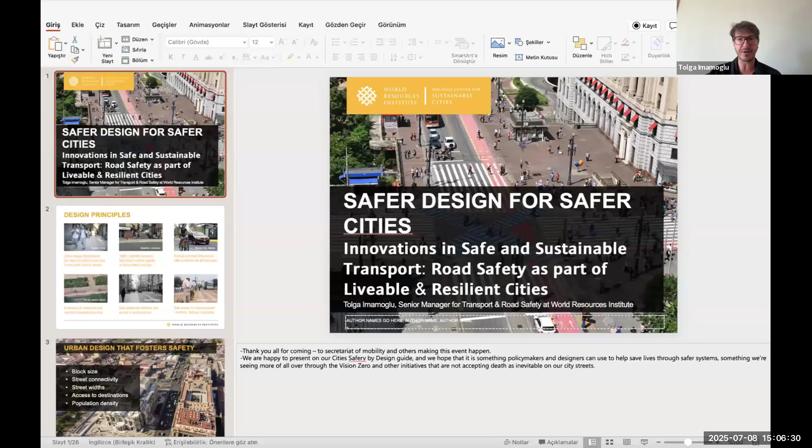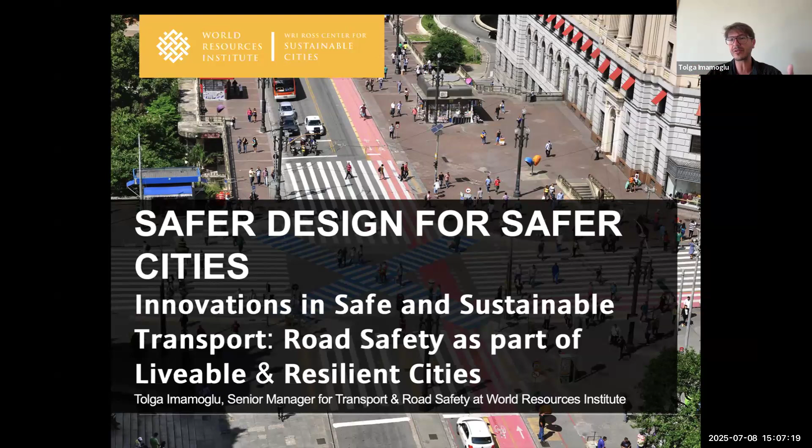Today I'm very glad to present the WRI guide, Cities Safer by Design. From my end, I believe this guideline is a complete guide for navigating planners, engineers, and even policy makers on how we can save lives and establish a safe environment for the whole citizenry and all road users in our cities. For our interpreters, I'm trying to speak very slowly.

Okay, here we are. In this guideline, we divide the themes into 6 design principles. In this slide you can see our 6 design principles. Each chapter in this guideline is focused on describing the elements and the evidence for implementing these measures.

In this guideline, I must outline that we didn't just get the best practices from the global north, like Stockholm, Amsterdam, or Copenhagen. We tried to compile different cases and best practices especially from the developing world, like Bogota Colombia, Istanbul Turkey, India, Mexico, and so on. We focus on the global south.

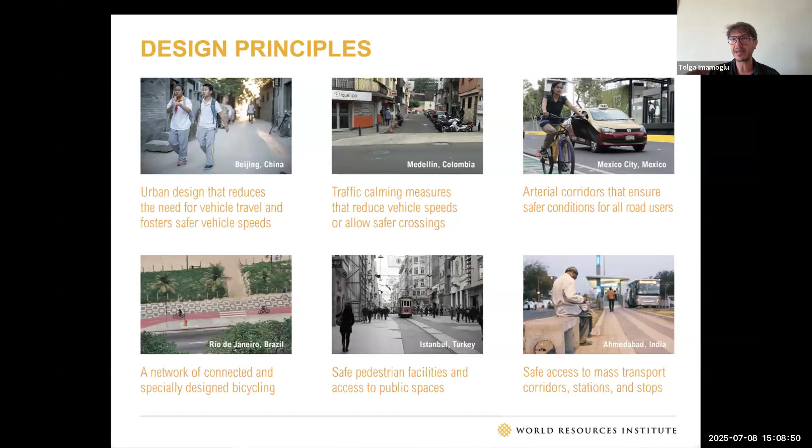My message is very keen and straightforward: good things are also happening in the developing world. The only thing we need to do is identify, measure the impact of these measures, and scale them in our context.

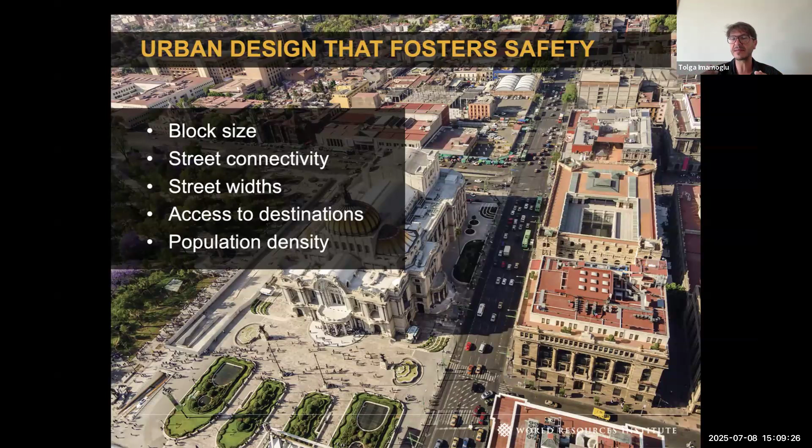So I would like to start with urban design, which is very key. All research shows us that cities with small block size, good street connectivity layout, and compact living with destinations nearby such as education, religious spaces, retail, and residences can be safer cities.

I just want to mention a couple of the measures that we put forward in this guideline. Small block sizes require a smaller reaction time and smaller stopping distance, which means we have to avoid superblocks and build our cities with small blocks.

In this sketch you can see that with small blocks, it's harder for vehicles to speed up, and it requires lower speed. But in that case, with small block sizes, we are going to have a number of intersections, which means we can have more traffic crashes. However, through lower speed we are going to favor fewer casualties and injuries, because we'll mostly have property damage instead. This is our design impact.

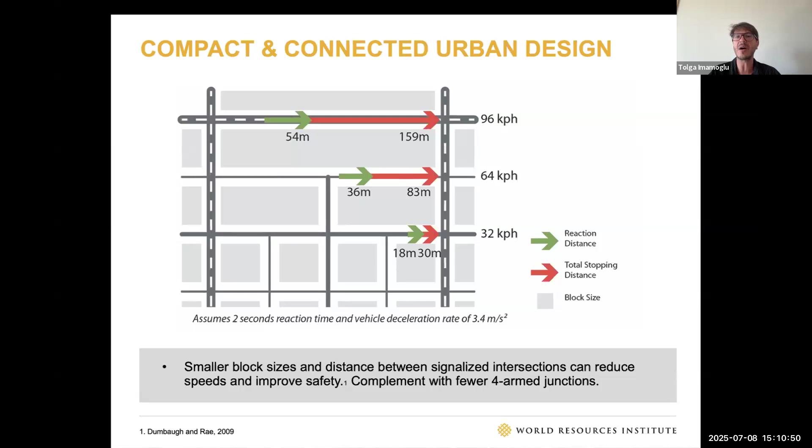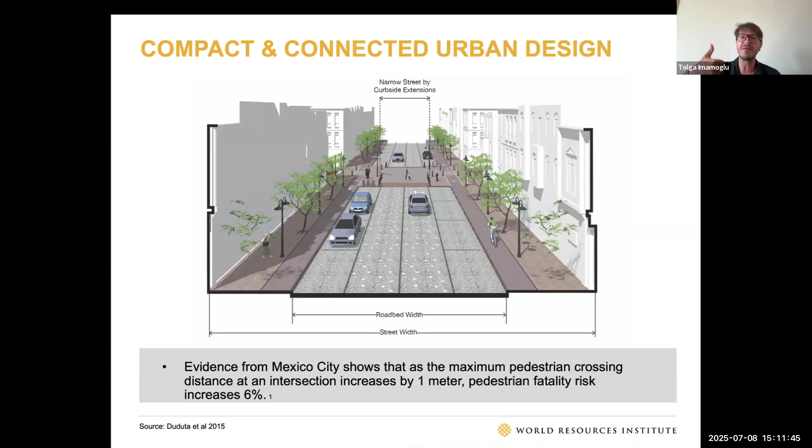This is a very key design language here. Again, if we increase crossing distance by 1 meter at an intersection in downtown, we increase pedestrian fatality risk by 6%. I think this is another key slide from my end.

5 years back, the pandemic threw everything out of gear, and at that time the mayor of Paris came up with the intervention of the 15-minute city. Maybe for the global north, like Paris, it might be convenient to use that proposal, but for the developing world it's quite challenging to establish a 15-minute city. In the global south, we can instead follow a neighborhood-level assessment.

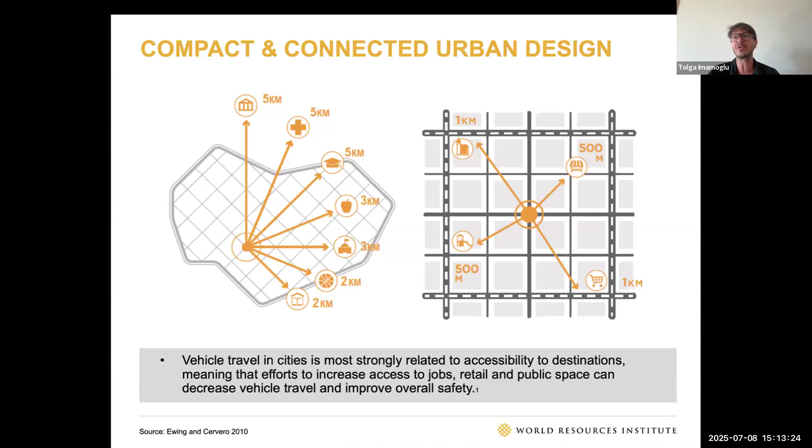Our major task must be how we can reduce vehicle travel in cities. So we need to create compact neighborhoods, so people can easily reach education, religious places, workplaces, or parks by walking and cycling in less than 15 minutes. My message is clear: we have to create our cities in a compact and connected way in order to reduce vehicle travel demand.

The traffic calming measures in this guideline show a set of interventions. We cannot just rely on speed limits; the speed limit must be supported by physical interventions, traffic calming measures. In this guideline you can see the whole series of interventions: speed humps, cushions, chicanes, narrowing down, and so on.

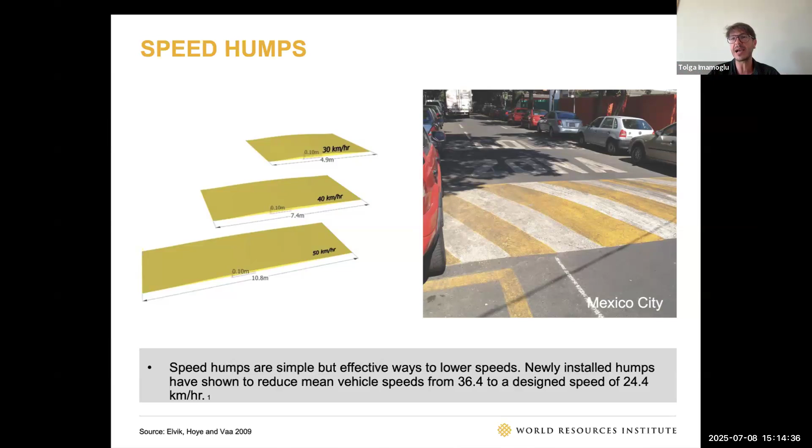This is the speed hump, a very cheap and practical way to reduce speed. My example here is from Mexico, where newly installed humps have been shown to reduce vehicle speed from 36 to 24. Based on the desired speed, you can design and implement this measure with different dimensions, width and length. These are engineering details, and some cities and countries have very complete national guidelines for traffic calming devices.

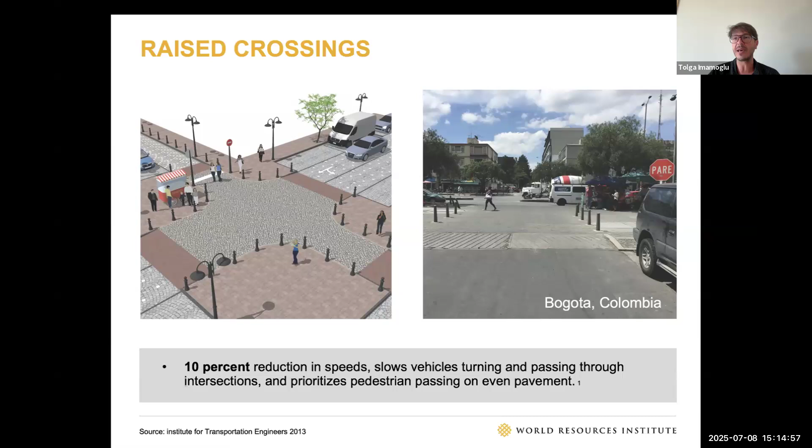The raised intersection is not a common intervention, but I want to mention it. From Bogota, Colombia, we found that raised intersections reduce speed by 10%. And the curb extension is similar - if we add 1 meter, it's going to reduce pedestrian crashes by 6%.

The urban artery is a very key issue, a common concern in road safety around the world - how we can redesign or revisit our urban arterials where we have casualties. Vehicles are speeding, retail shops and facilities surround that area, and pedestrians and passengers are there - the artery is the heart of the city. So we have to come up with a unique solution.

If we would like to change our urban artery in a safe and accessible way, we have to consider the complete street approach, which means we have to claim space from motorized vehicles and adopt a mass transit system - it might be central median BRT system. At the same time, we can support this system with walking and cycling facilities. The complete street approach is a key intervention for redesigning our urban arterials.

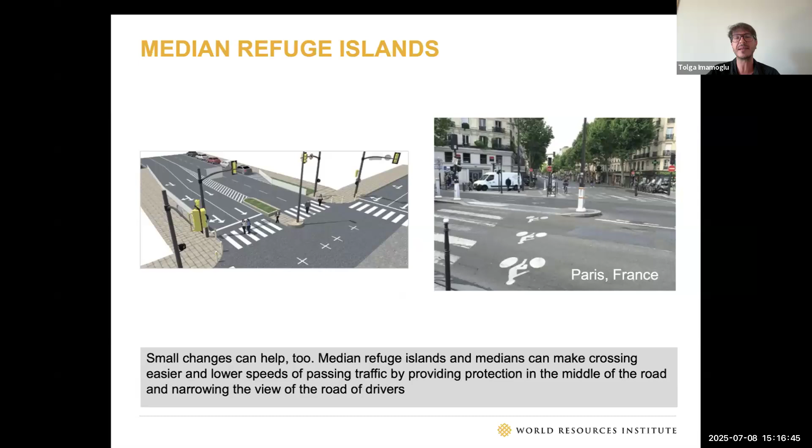Even a small change, like putting in a median refuge island, can save lives and improve motorcycle safety. This is a hot topic in road safety in East Asia, Latin America, and Africa, like Uganda and Kenya, Nairobi. We have recently launched a new guideline on how to improve motorcycle safety. We need to carry out an additional special session to discuss motorcycle safety, but my best advice is: you have to invest in public transit in order to improve motorcycle safety.

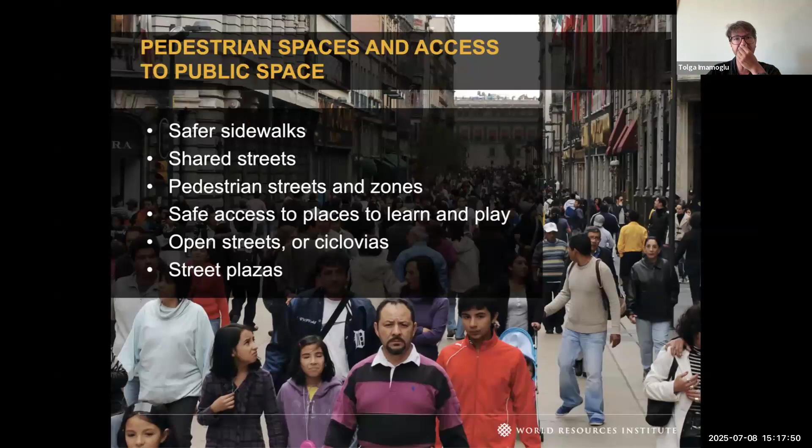There are some design interventions for sure, but I think the best way for cities is to invest in public transit. For pedestrianized streets and pedestrian space, there are a few guidelines on how to establish pedestrian streets, and in this guideline we have also carried out a survey. I would like to encourage all of you to go out and run a survey with your citizens and collect their thoughts on how you can provide safe and accessible walking facilities.

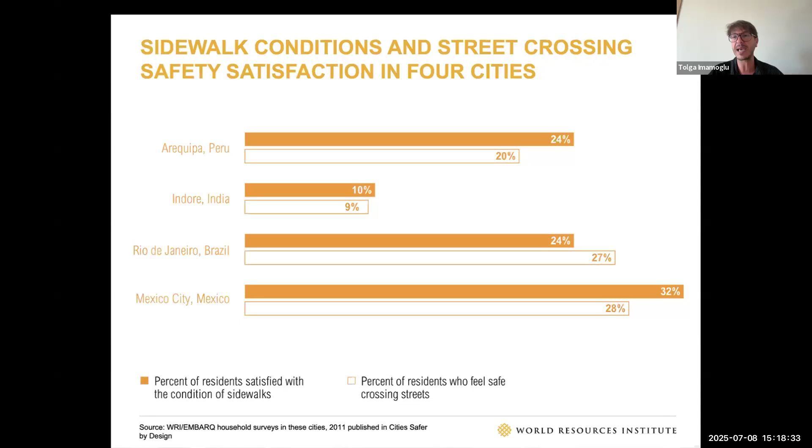Satisfaction is very poor in Brazil, Mexico, India, and Peru. If you renovate the sidewalk or pedestrian walkway, it has to reduce speed in that corridor by around 50%, and it has to reduce traffic casualties. In my own country, Turkey, we pedestrianized the whole major arterial in Izmir, and we found that we reduced casualties by 50%.

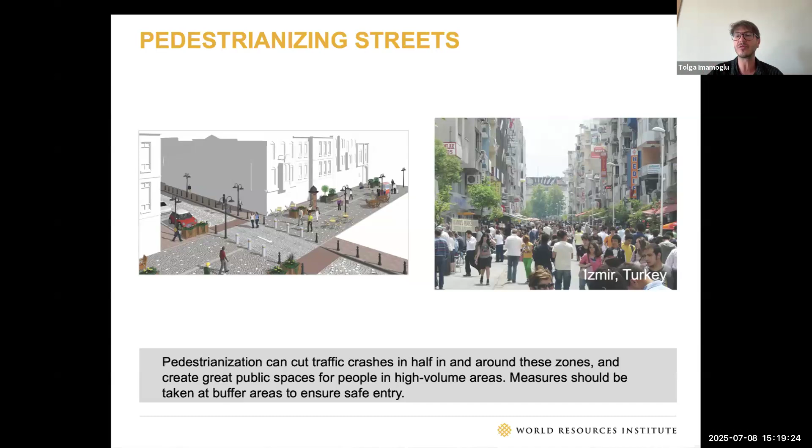Pedestrianization is one of the best interventions to reduce casualties and speed. New York did a great job back in the day with street plazas, adding furniture, and people actually enjoyed Times Square. The outcome was a 60% decrease in speeding and 26% reduction in injury with the street plaza. It's a win-win—people can enjoy the city, and this is the best environment to establish road safety.

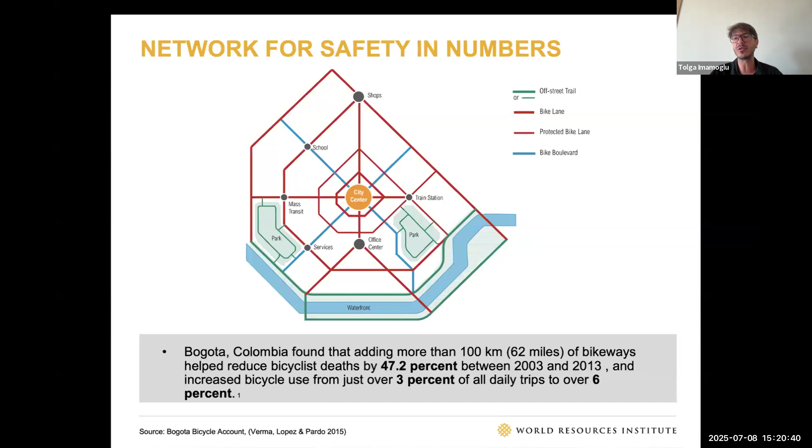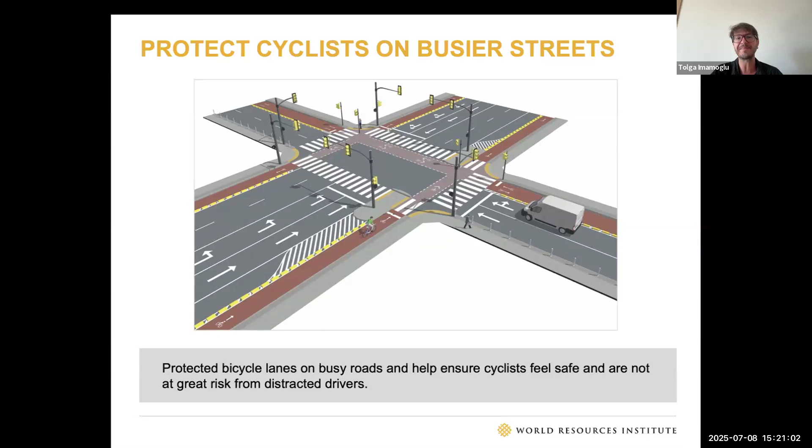And safe access to transit. As I mentioned regarding motorcycle safety, cities must invest in public transit from A to B, as it's the safest and most accessible way of moving around cities.

My recent work is from Kumasi, Ghana, where I just finalized a speed management plan. One key recommendation is that we have to pick some corridors as transit corridors, meaning we can run minibuses or reshape further BRT systems. We need to develop transit corridors that allow us to reduce speed while moving people with more accessibility. So transit and public transport are also a solution in road safety.

I keep saying that sustainable transport saves lives. So thank you, I hope I've done this in time.

Today I will talk about how safer vehicles and technology can help with managing speed, speaking on the other side from road design. We will speak on how we work on vehicle safety, how we introduce vehicle safety technology that can manage the situation, the traffic, the impacts, to reduce impact speed or avoid the impact between the vehicle and other road users.

When we talk about the vehicle, we talk about the 4 stages of vehicle safety. First, we talk about the first stage, where we call driving assistance, safe driving, where we should drive safely and avoid the crash with different technology adapted in the vehicles.

Next, if there is any risk of a crash, we come to the phase of accident mitigation or avoidance, where the technology installed inside the vehicle will work. If there is detection or risk of crash, we try to activate different technologies to mitigate or avoid the crash. Finally, if there is a crash, there is passive safety where it will impact the accident or the crash.

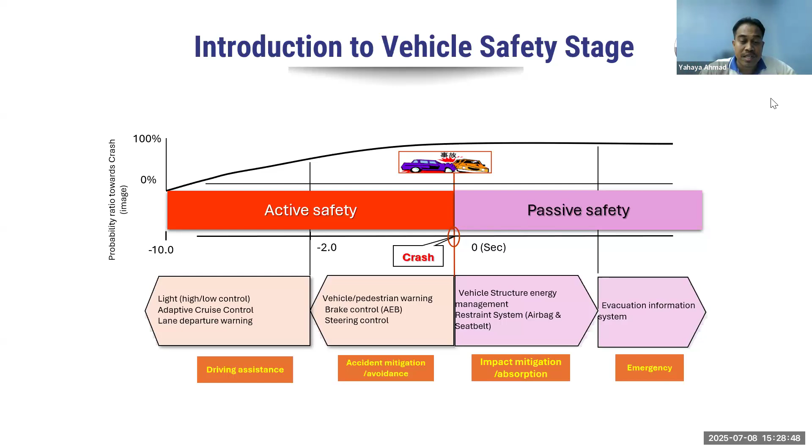Today, talking about how safer vehicle technology can help achieve better speed management in the city, we will speak on the first and second phase: safer driving and accident mitigation or avoidance. This is an example of traffic conflict in the city area, in a housing area, where from the vehicle side we will study and understand the situation.

So I will play the video. We will understand how the vehicle is moving.

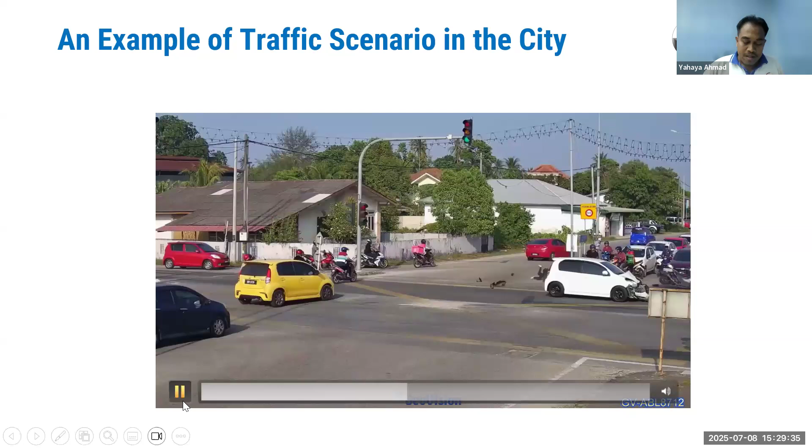Where's the conflict? You can see a lot of motorcycles and a car coming that impacts the motorcycle. In this situation, we will work to make sure we understand it, and design technology that will help avoid the impact and reduce the impact. That's where vehicle technology comes in.

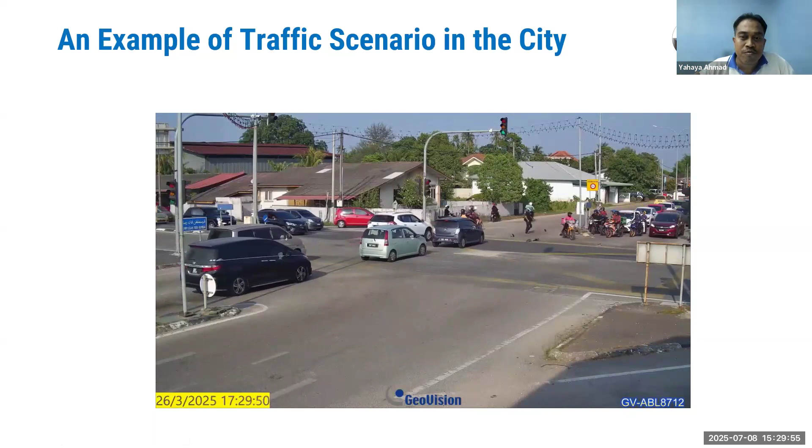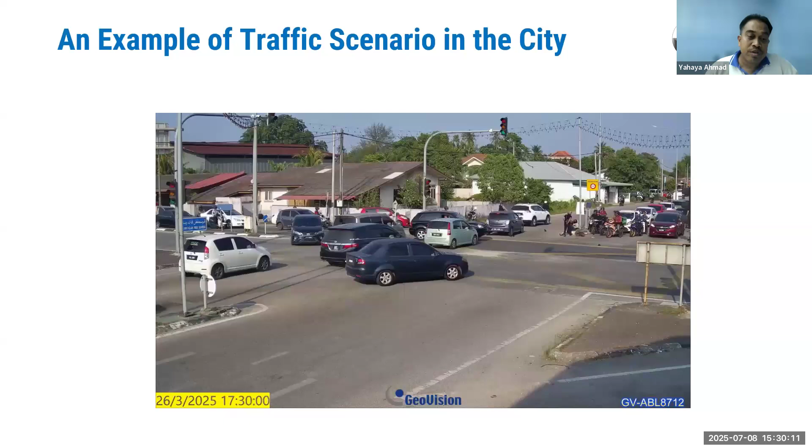To make sure we can avoid the impact between the vehicle and vulnerable road users, either pedestrians or motorcycles—this is really a big issue in ASEAN countries—on the vehicle safety side, we work to manage this through the introduction of a lot of technology.

For example, the first technology we introduced inside the vehicles is electronic stability control, where we manage the vehicle during braking to make sure there is no loss of control. Then you can have a proper maneuver of the vehicle to avoid the crash.

We also introduce a speed limiter, so we can restrict the speed. It's designed to prevent the vehicle from exceeding the speed limit. By this, we can control the speed of the vehicle traveling.

Now we are working a lot on autonomous emergency braking, where the brake is applied automatically by the vehicle in response to a detected likely collision. By this technology, we reduce the vehicle speed and potentially avoid the collision. But the ultimate target is to avoid the collision.

By this, we can work to solve conflict between car to motorcycle, car to pedestrian, car to car, and car to others. We are working on this to make sure we can have better technology to avoid any crash or impact between these road users.

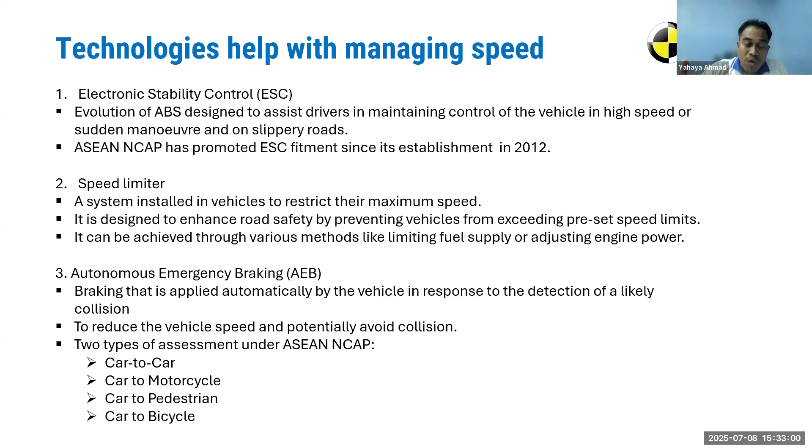From this, we work out to make sure that we control the vehicle design, the technology that design and adapt to the local situation.

We also have another example of technology: adaptive cruise control, where we adapt the speed between different vehicles, and also manage the speed to avoid the impact.

We also are starting to introduce rear cross traffic braking. I will show the example after this. It's an automatic emergency braking in the parking area, designed to help avoid a rear end collision when reversing, for an oncoming motorist detected from either the left or right side of the vehicle. This is very important in the parking area, for on-street parking, to avoid the crash.

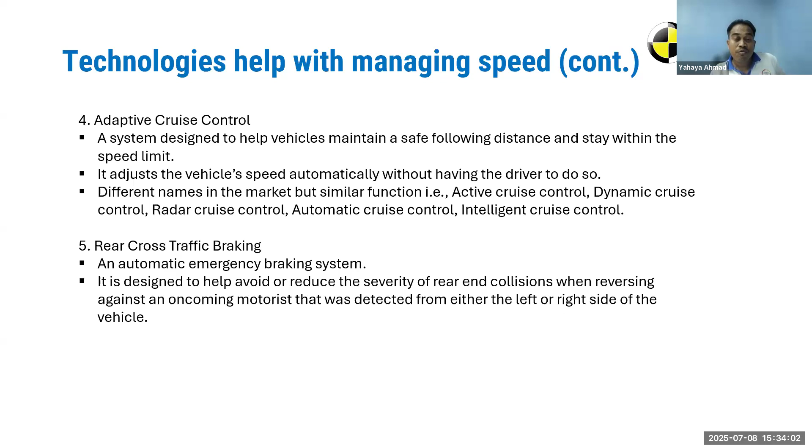So with this, we have auto braking technology for motorcycles, which is a main issue in ASEAN countries. By avoiding the crash between motorcycles and vehicles, we can reduce the fatalities in our region. I think 60 to 70% of fatalities come from motorcycles, so we are focusing a lot on motorcycle issues in our region.